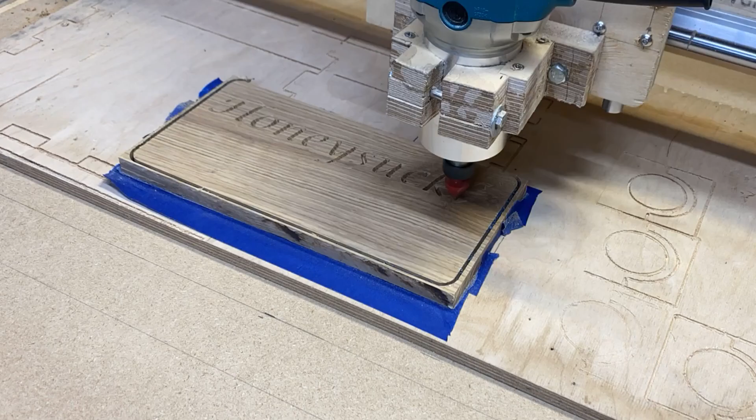The sign we're going to create is a basic house sign, which in my case is on oak, but I would recommend maybe using some MDF or some pine to start you off.

Using Vcarve software, once you have mastered the basics of Vcarve, you'll soon be designing and creating your own projects. Let's get started.

So the first thing to do is to open up Vcarve. In this case it's Vcarve Pro, and it's version 10.513.

So if you look on the left hand side where it says Start Tasks, the first one is Create a New File. So we click on that, and now we've got our job set up, which is basically the size of your project.

So it's single-sided, then we've got job size. In my case we're going to do a sign 11 inches by 5.5, and it's 3/4 of an inch, and you can do inches or millimeters, whichever you prefer.

And we're setting the 0 position to the surface, and the datum point we can either have in the center or you can have it top right, but I always like bottom left, just because that's what I would use, but whatever's convenient for you.

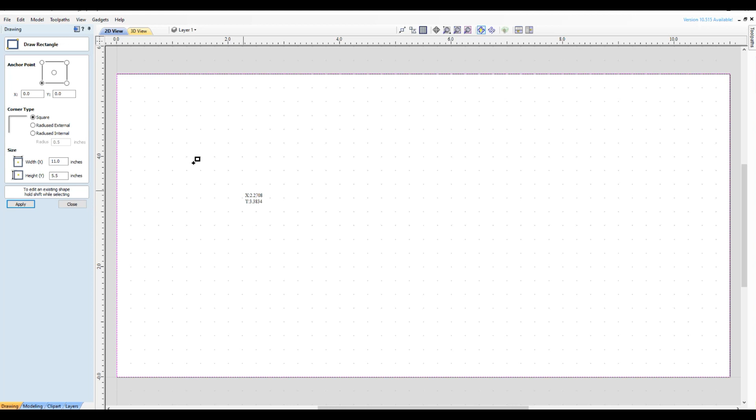So we can either have a square edge, which is what we got there, or you can have a curved edge on the inside, and you set that, which then each time you do it you apply.

But if you wanted a big edge, we changed that to something like 2 inches or 2.5 inches, and then do apply, then you get a really large curve, and maybe that's what you want.

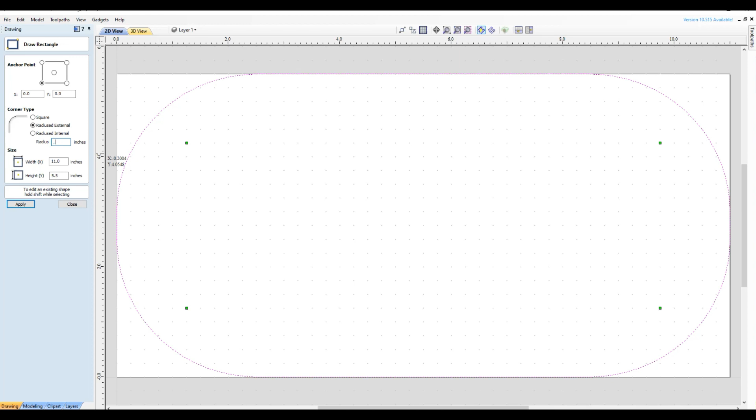But I think for the small sign that I'm doing, just the corners curved off would be nice. So 0.5, apply, and there we are. That does the outside of the perimeter of it.

So just click close. Now the next thing we want to do, we click away, so you can see the pink all the way around. If we click away in the screen somewhere, it's gone black.

That means it's not active. And if we click on the line again, it's gone pink again. So we want to deactivate it at the moment.

And now we're going to add some text. So again, create vectors, third one down, you can see the T, it says draw text, and you click on that, and now at the top you type in what you want. So I'll just do that.

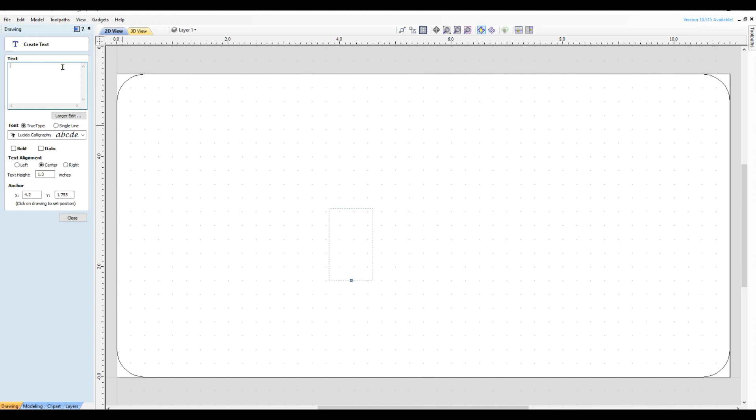So you put in whatever name you want for your sign, and you can see, looking at the screen, it's sort of a bit all over the place, but don't worry about that at the moment. So then we can just choose the type of text we want, and there's a fonts, you just drop down this little arrow here and you choose whatever you want.

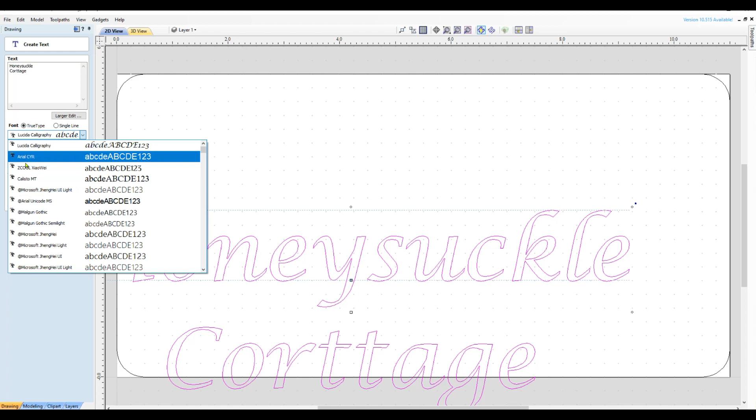I'm going to keep it at Lucida Calligraphy, and that looks quite nice. It comes out quite well as well. So, and then you just click close.

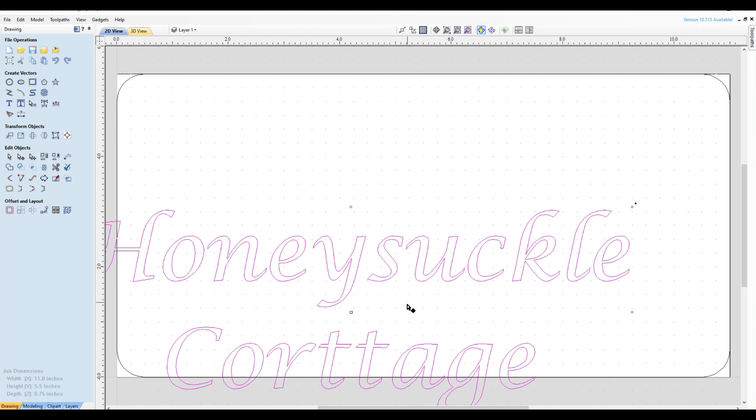Now to centralize this, you can either highlight it, click it twice, and then you'll see these little corners. If you go to the center, you can just drag it around wherever you want. So you can estimate, you know, there's about half if that's where you want it, but it'll be a lot of fiddling around.

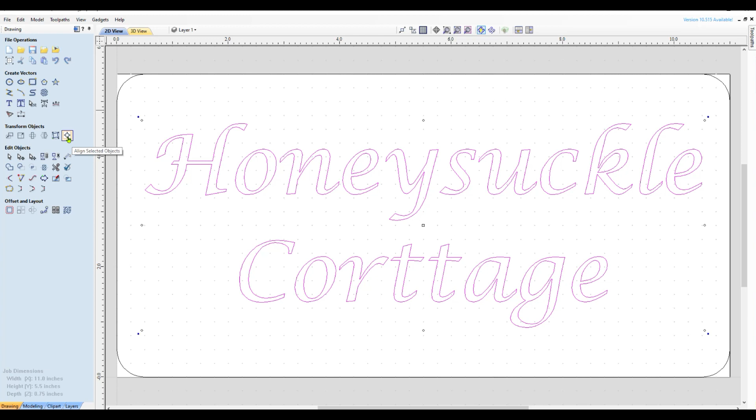An easy way to centralize this is to go over to transformation, there's one here on the right. Click on that, and you can choose how you want to centralize it. If you go to the top, the middle one, when I click it you'll see it move slightly, because it puts it exactly where we wanted it. Let me move it, and if I click on it again, it puts it in position.

So that's it. If you're happy with the size of the text and its layout, you can just click close. Again, it's active when it's got a pink color, and if we click away from it, it's gone black.

So the next stage is we've got to do the toolpaths. At the top left there's a little arrow, switch to toolpath. You click on that, and all the icons you need for setting this up are on the right hand side now. If you want to go back to the design, at the top right there's the same little arrow, and it'll flip you back, so you can go back and forth.

The first thing we want to do, it doesn't really matter which way you do it, but the outside perimeter is basically going to be an end mill, and it's just going to cut all the way through and shape it. So for that, on the right hand side, we want this profile toolpath.

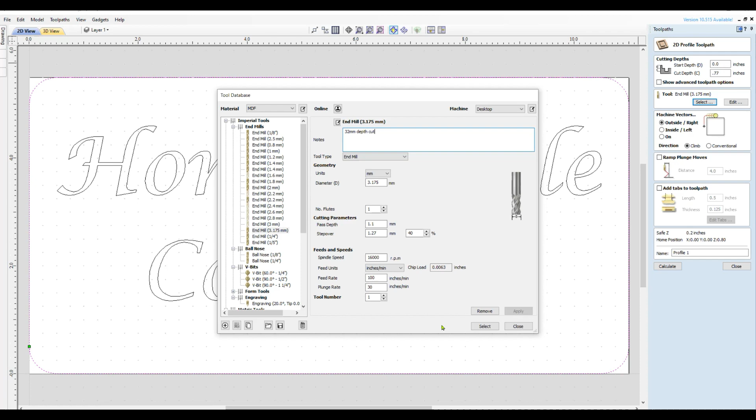This one's fine, all the settings are okay, you don't need to change any of these. So at the bottom we just tick select, and that's your tool selected.

Now the next main section is the machine vectors. We can go around the outside or the inside. I like to do the inside because I've measured this perfectly. If your wood is larger, if you've actually got a piece of cut wood larger, then you could do the outside. But since my piece is pretty accurate to these measurements, I'm going to use the inside, and it'll just cut all the way on the inside of the pink line.

So that's okay, we don't need to ramp plunge. Now, adding tabs - if you're using a large piece of wood and it's not fixed, I usually use tape with super glue, and it holds it nicely and doesn't move at all.

But if you've got clamps, you probably need a slightly larger piece of wood than this, because otherwise you can have trouble clamping it. But if you want to add tabs, you click on tabs, edit tabs, and on your mouse you'll see the cross at the top. When you put the cross on the edge, every time you click it'll add a tab there, one at the bottom, and one on the front.

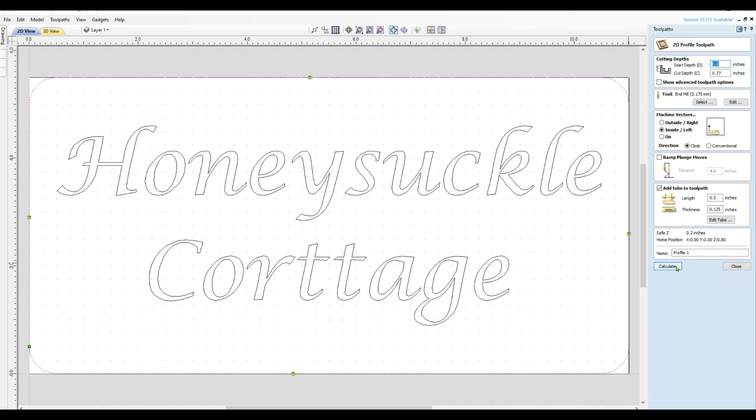You can add as many or as few as you want. I'd keep them away from the corners, because when you're finished cutting, it's easier to sand any rough bits than trying to do it on the corner. Then you just click OK, and now all you've got to do is click calculate at the bottom, and it'll work out the toolpath. It'll ask you a warning saying that the tool is going to cut all the way through the wood, which is what you want.

If you were doing the letters, you would be able to make some adjustments, but in this case this is what we want, so we can click OK.

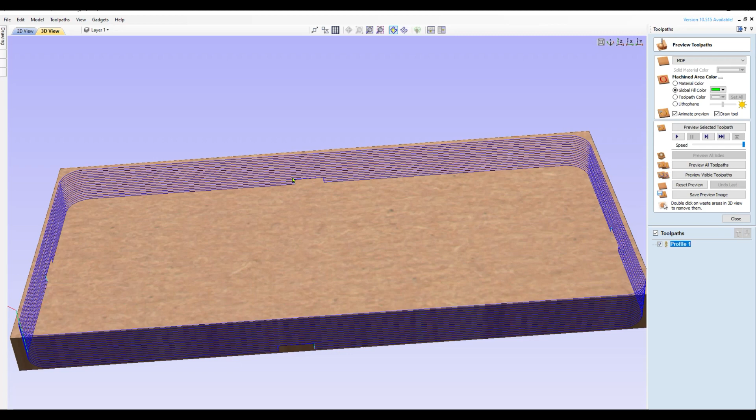Here you can see the little nodules there - we've got tabs that we've kept. You can see them both sides and on the end. There we go, you can see them there, and there's 4 of them, and you can see the circumference of the timber.

So that's our profile 1, and if you wanted to label that, you can just right click, rename, and call it end mill, just to give it a name that means something.

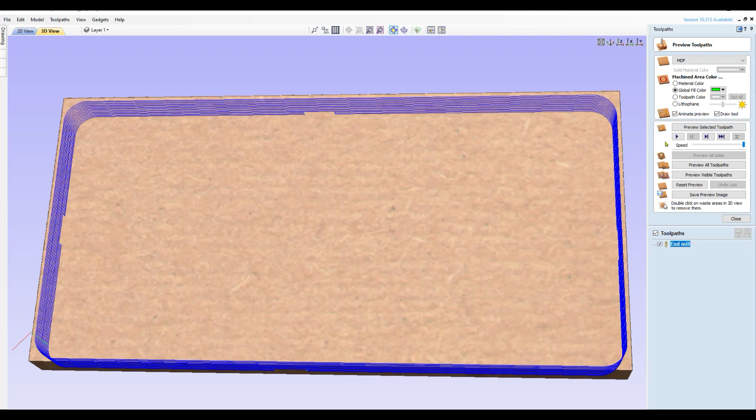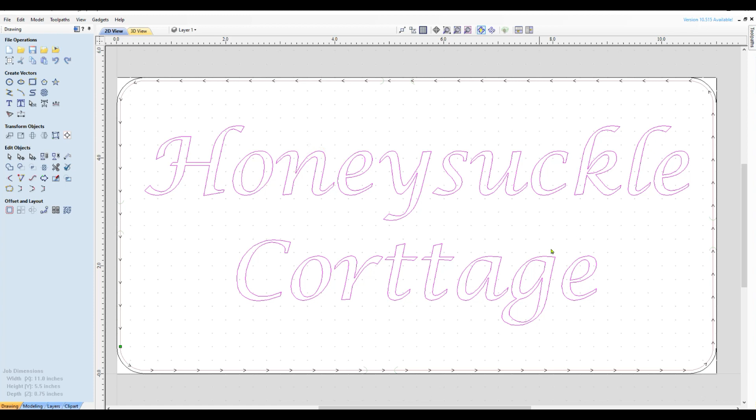That's done. Now we want to do the lettering. So again we go back to our drawing tools, make sure it's back onto 2D, which is at the top, unclick the pink surround because we don't want that anymore, and click on the lettering, and here you can see all the lettering's gone pink. So then we go back to the toolpath section.

I want to close this box. Now this time I'm going to use a Vcarve, a V-bit. Here you can see you want the little box with the V on it, and select. Now if you look here, there's no depth for how deep we're going to go - it's because the V-bit does it automatically, so you don't have to put anything in there. You can change it, but you don't need to for most items.

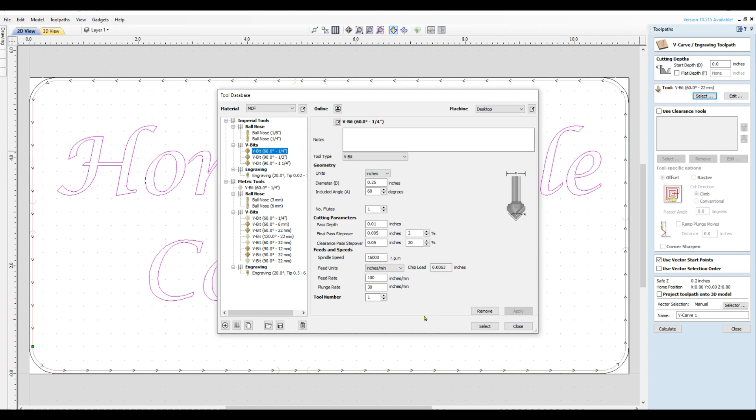So we're going to select the bit - we're going to use a 60 degree bit there, and everything's set there. Generally the settings are okay, you can adjust them with experience, and then we click select. So now we've got the bit selected. Everything else is set because it's a V-bit, and then we go down to calculate.

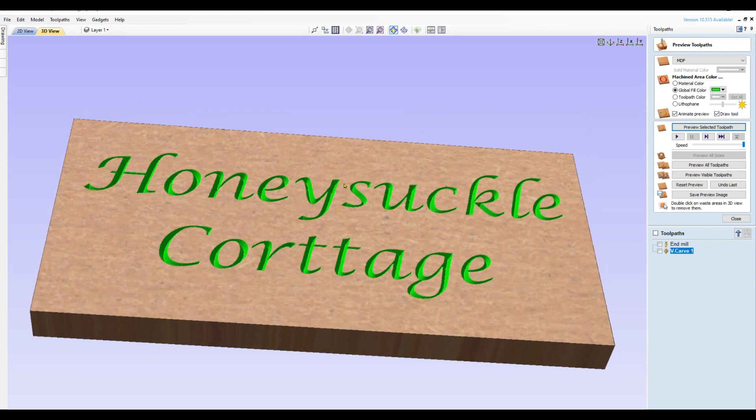Here you can see where it's going to cut everything out. And if I tilt that up slightly, again you can see how it's going to look. If I just go to preview selected toolpath here - it won't actually come out green, that's just for shading. Then if I tilt it, you can see it's come out quite nicely.

It's a good way of checking that all the lettering is going to come out perfect, because this is how it should come out. Sometimes you get bits missing, and it's either because your bit's too big or too small, and you'll need to readjust it. But for this lettering and this size, you can see it's perfect.

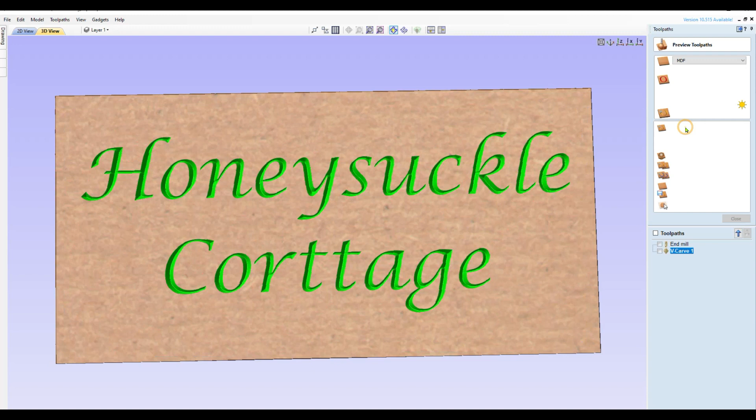Now we've got the toolpaths on the side here, you can see we've got Vcarve - well, I'll leave it because I know now that that's V-bit. So all we have to do is, if we click on them both, you can see them both showing, and then a preview shows it again. At the moment all we need to do is close the box on the right.

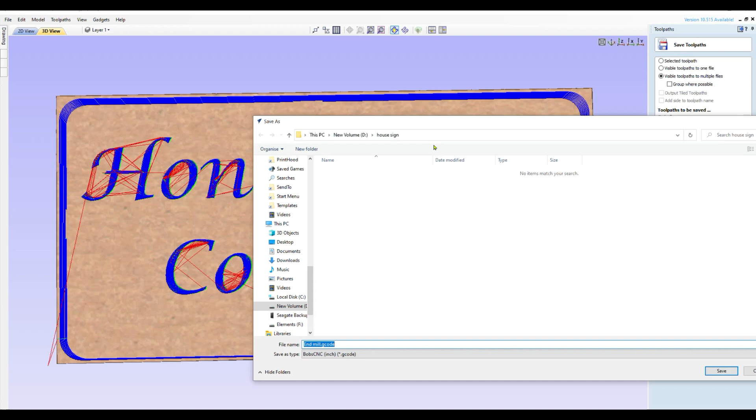Then we need to save - all we have to do now is save our toolpaths. So we've got the end mill and the V-Carve 1 files. If we check at the top here, the first three, we want this third one down, which is 'save toolpaths to multiple files.' We want individual files because you've got to run them separate, since we've got an end mill and a V-bit. Then we just go to save and put it into a folder where you know where it is. I've set this one up as house sign, click on save, and that's it, it's done.

Now if I pull up the folder, you can see there are two files which are the same as these two toolpaths we've got down the bottom here.

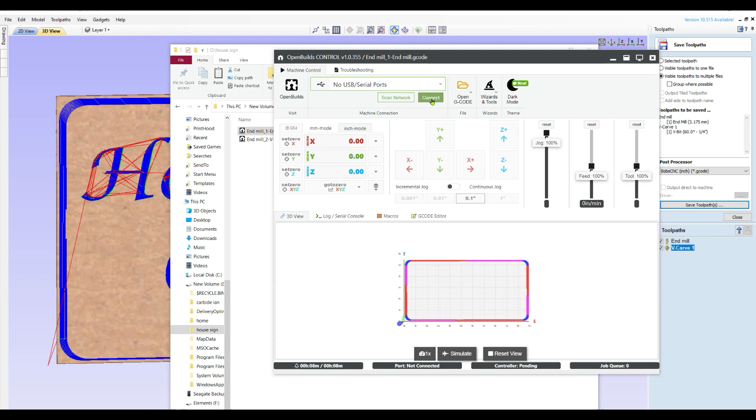So if I open one, let's do the end mill first. I've opened them up using OpenBuilds CONTROL, and you can see the circumference of our piece that we're going to mill first. Obviously you need to connect your machine. If I open up the other one, this will be the text of our sign. Fingers crossed, and there we are. Again connect, and then just run it, remembering to change from an end mill to a V-bit for the different stages of the sign.

I hope you have found this helpful.